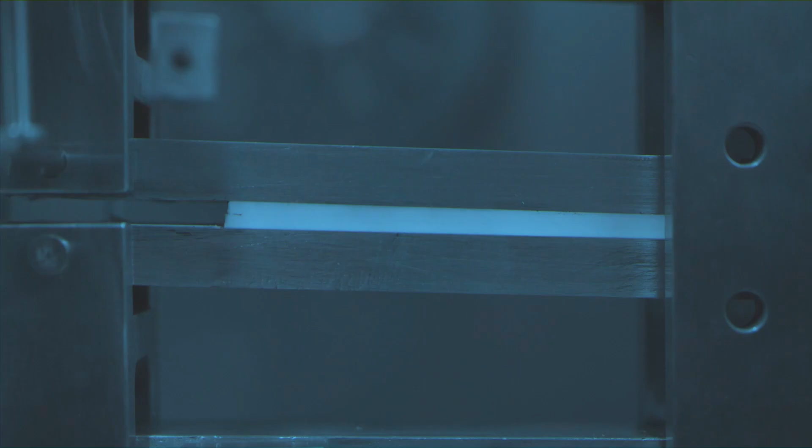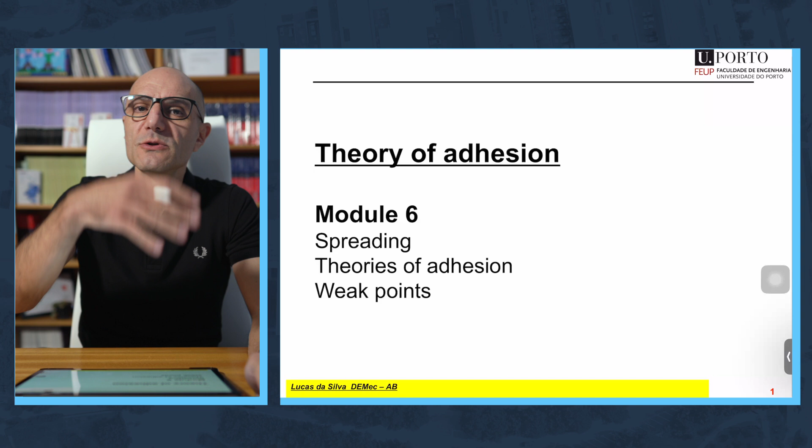This is the last part of the theory of adhesion. We will see how we can predict spreading of the adhesive and discuss the various theories of adhesion. In the previous module, we have basically seen the concept of the surface energy. But what do we do with that concept? How can we predict if an adhesive will wet or not, will spread or not at the surface of a substrate? That's what we are going to see in this module and discuss also other theories of adhesion and also the weak points associated to these theories.

So we know now what is the surface energy of the liquid, of the solid. It's much easier to understand in the case of a liquid. We have seen the demo with the needle on top of the water. What do we do with that? Well, there are many ways to explore this, more or less complex with many equations, but there is a principle that is very easy and that works, which is the principle of minimum energy.

And what this principle says is that if you have a surface of high energy, that of the solid, and this surface is substituted by another one with low surface energy, that of the liquid, then the total energy of the system decreases, and that's a spontaneous process. In other words, if the surface energy of the liquid is lower than that of the solid, then the liquid will spread. But if the surface energy of the liquid is higher than that of the solid, the liquid will not spread. So like this we can predict if we will have a good adhesion or not.

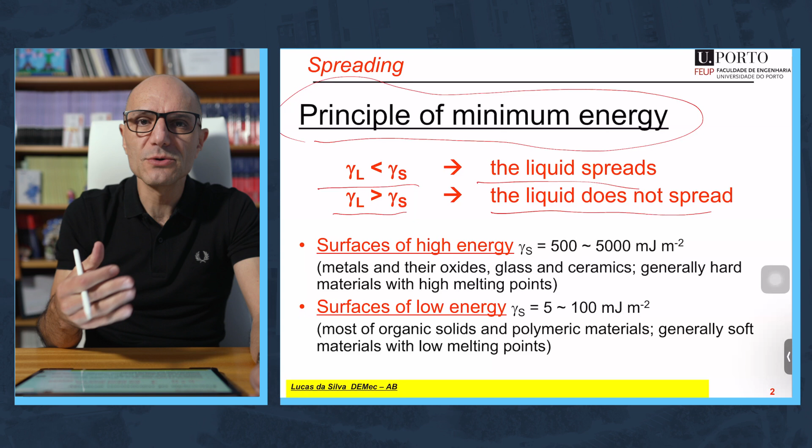Now, which materials have a high surface energy by nature? It's easy. It's those that are very hard. So metals, ceramics, by nature they are hard and they also have a high surface energy. They are easy to bond. Plastics, for example, they are very soft and they have also a low surface energy. They are very difficult to bond, all right?

You have here an image that shows which shape an epoxy will form at the surface of various materials: aluminum, PVC, a plastic, polyethylene, another plastic, or Teflon. Teflon is the worst case scenario, and you know that Teflon is used precisely when we don't want it to stick. You see, it's nearly a spherical droplet. So really, it varies from surface to surface. If you know the surface energy of the epoxy and those of the surfaces, you can predict if it will wet or not.

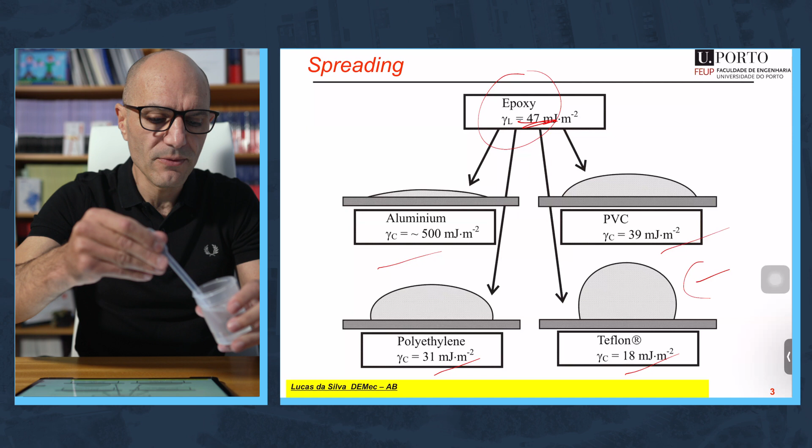We can play a bit now and do a demo with various substrates, and we will put a drop of water on each of them, and you will see the shape that it forms. We will go from very hard to very soft. So I have this pipette, and I will put water a bit on. I will start with glass. Glass is very hard, and I put my drop, and you can see that it wets. It spreads very nicely on the surface. It's expected because it's very hard.

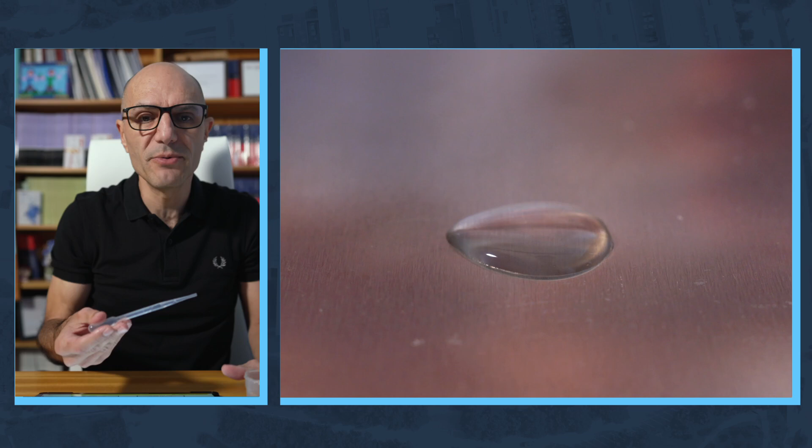I do the same now with the metal, with aluminum. And, well, the spreading is nice, but not as nice as the previous case, as with glass. Now, I go to a plastic. And again, it's getting round. The contact angle is increasing from this situation to this situation. It's very hard, less hard, and quite soft. And the contact angle is increasing.

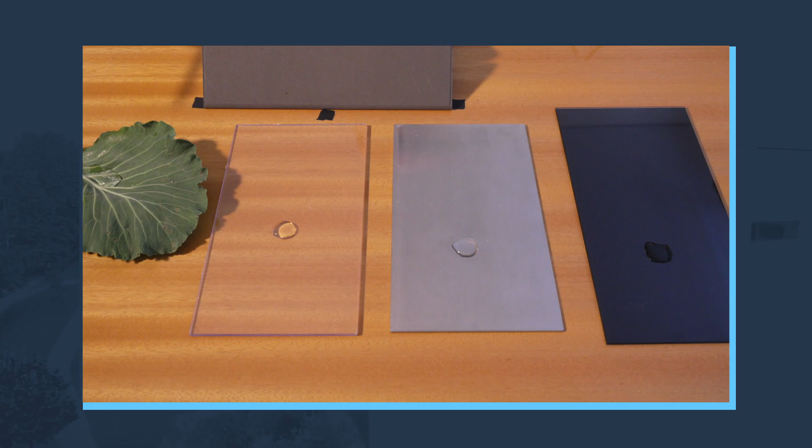And finally, I have a cabbage here. You all know what happens with cabbage when the rain drops, and you see, you have beautiful spherical shapes. Can you see? It's really, really nice, beautiful, okay? So, depending on the surface energy, the water will spread or not. The same happens if you use an adhesive, of course, but it's much easier to use water.

Okay, so after having seen this, how can the user intervene? What can we do to improve matters? Well, basically, increase the surface energy of the solid. For those that naturally have a high surface energy, like metals, like ceramics, what do you need to do? You just clean the surface, because all the surfaces have dust, grease, oil, so you need to remove these substances, and then you are left with a high surface energy. In the case of plastics, you can clean as much as you want, but the material itself has a low surface energy. In that case, you need to apply a surface treatment to increase the surface energy.

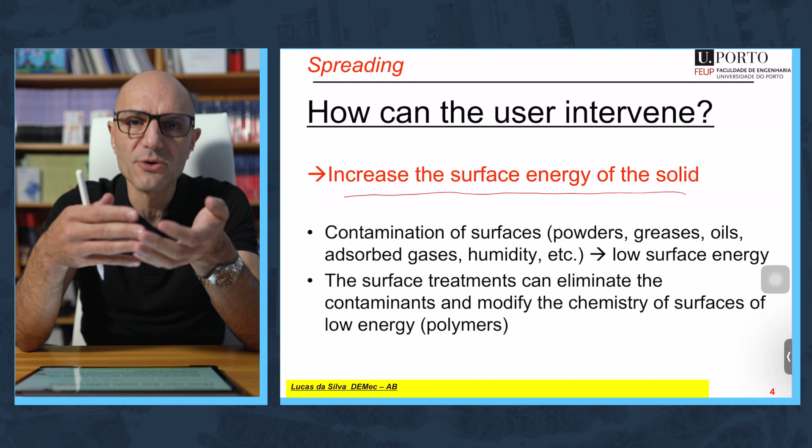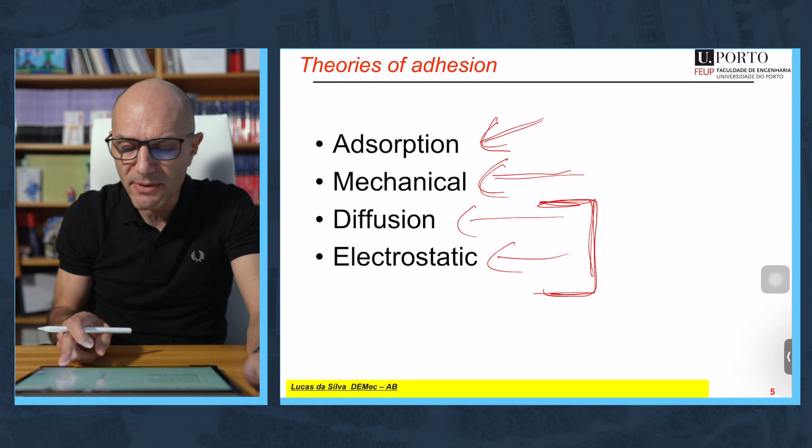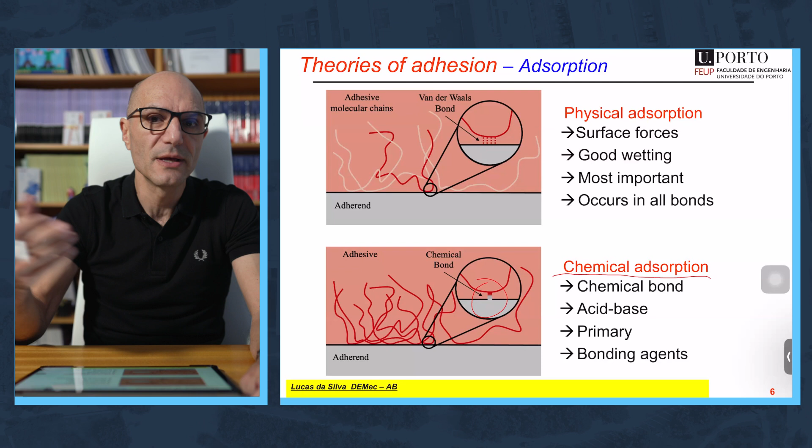But let's do a recap of the theory of adsorption. Basically, it says that when you approximate sufficiently the molecules of the adhesive to the substrate, boom, you will have van der Waals, and you can have ones that are stronger than others. The polar ones are stronger than the dispersive ones. You have a particular case of adsorption, which is the chemical adsorption, which is when you have a chemical bond. But in that case, you need to apply a special substance at the surface of the substrate to cause chemical bonding. And this will give you, of course, a higher adhesion and a higher joint strength.

But let's look at the other theories of adhesion, the mechanical one. This scheme is very easy to understand. As you know, there is a roughness associated to the surfaces, which is represented here in the substrate. And if the adhesive can penetrate into this roughness, because in general it can, if it has good wetting properties, then after hardening, there will be the creation of an interlocking at the surface, like this, and this, of course, also contributes to the adhesion.

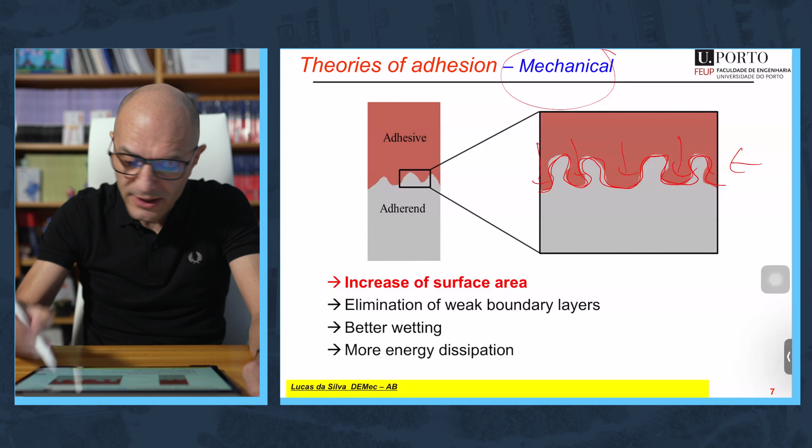In addition to this interlocking, because you have roughness, then you have an increase of surface area, increase of van der Waals forces. In general, you have roughness because you applied emery paper or shot blasting. This removed weak boundary layers. I'm talking about weak oxides. In general, roughness means better wetting, and finally, more energy dissipation because you will have plasticity of the adhesive at the interface.

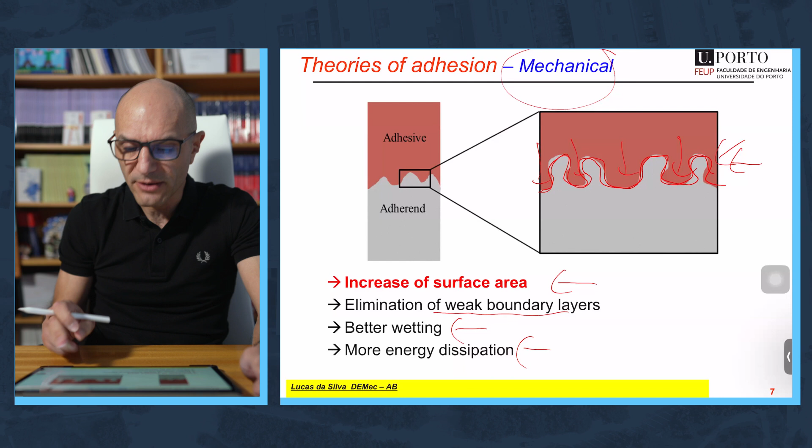The diffusion is a very particular case, and it happens when you have welding by solvent or heat in thermoplastics. I don't know if you have seen in your life how the PVC windows are made, but basically you have two pieces that are joined together because they are heated at the joining place. They are heated, a pressure is applied, and that's how it's done. It's a kind of welding. But this happens because you have interdiffusion of the molecules of the two polymers together, and this causes the welding.

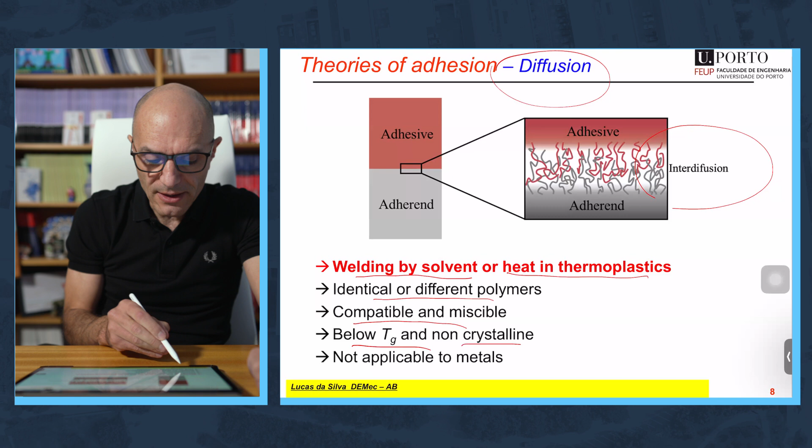But this can only happen if you have identical polymers. Different, it's a bit more difficult. They need to be compatible and miscible. They need to be below the glass transition temperature so that they melt. They can't be crystalline, and this is not applicable to metals.

Another theory is the electrostatic one, again even more particular than the previous one, and this is especially applicable to pressure-sensitive adhesives. I have shown you one pressure-sensitive adhesive when I did the demonstration about the peel. What happens is that you can consider this as a kind of condenser. One part is positively charged and the other part is negatively charged, and this causes attraction between the pressure-sensitive adhesive and the substrate. But this theory of adhesion is not that important.

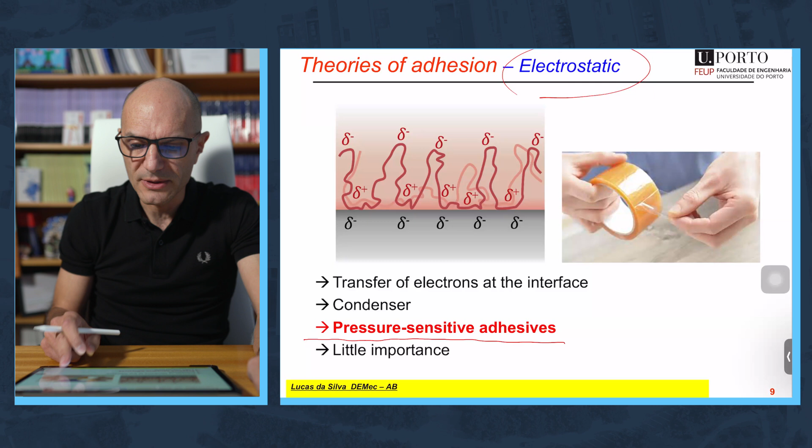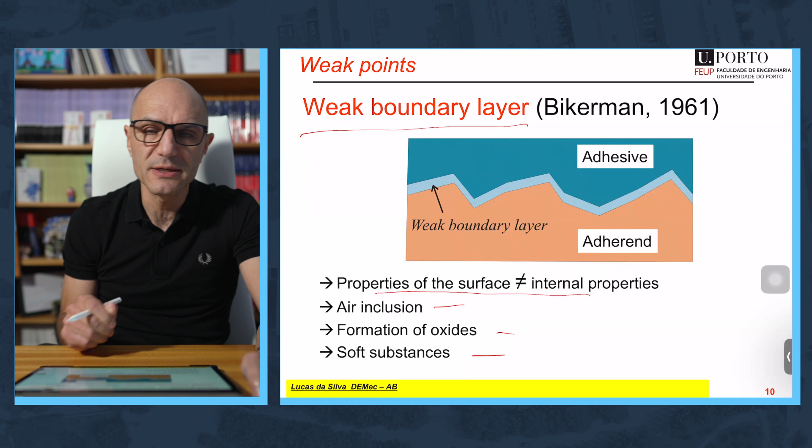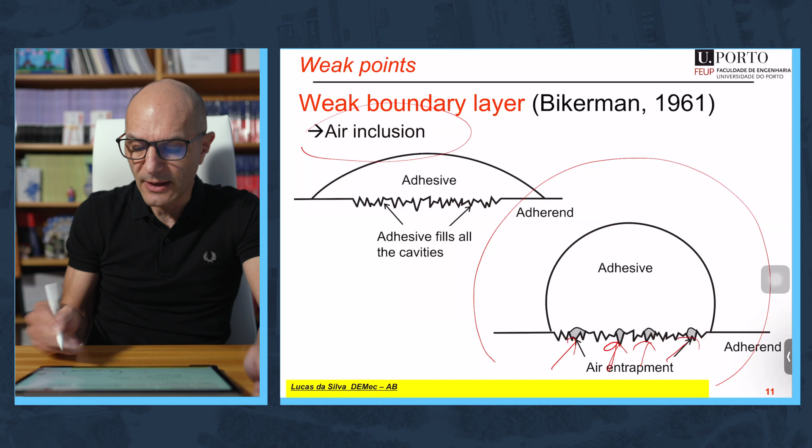But what's important is to refer to the weak points associated with the theories of adhesion. These theories of adhesion that we have seen don't take into account these weak points. The first weak point is the weak boundary layer. Why? Because the properties of the surface are different from the internal properties. It's unavoidable. You can have air inclusion, formation of oxides, and the migration of substances to the surface. For example, in the case of air inclusion, if you don't have good spreading, like the one represented here, then it's very easy to have air entrapment here. And this is not taken into account in the theories of adhesion.

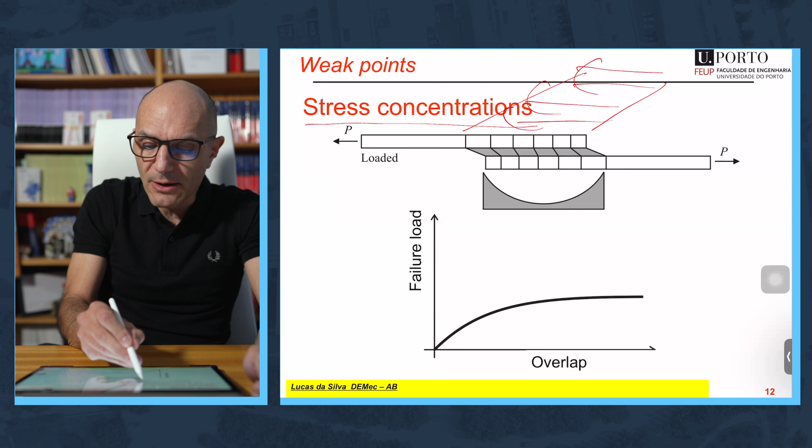Another thing that is not taken into account is stress concentrations. Well, I told you that when you load a single lap joint, the stress will be uniform. This is along the width, and it's true, I maintain what I said. But along the overlap, it's a different story. When you load a single lap joint, you will have stress concentrations at the ends of the overlap in the adhesive. We will see this in more detail in the section of joint design.

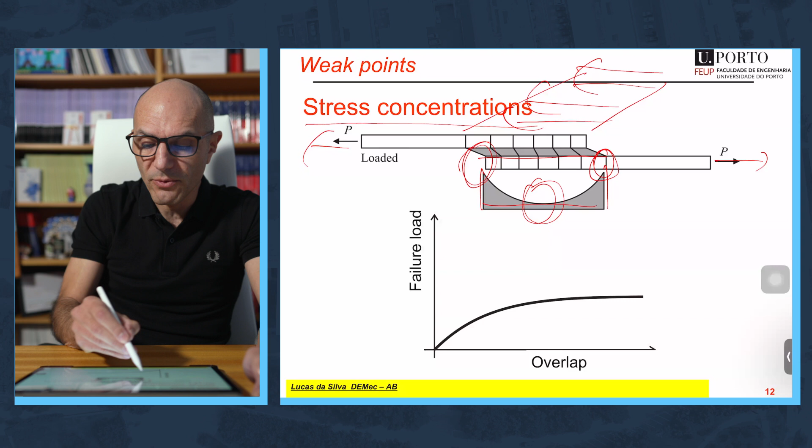So what does that mean? It means that in fact the stress is all concentrated at the ends of the overlap. The middle is doing nothing, and it doesn't really matter if you work with a short or a long overlap; the strength will be the same from a certain overlap, which is what is shown here in this graph, failure load versus overlap. And again, this is a point that is not taken into account in the theories of adhesion.

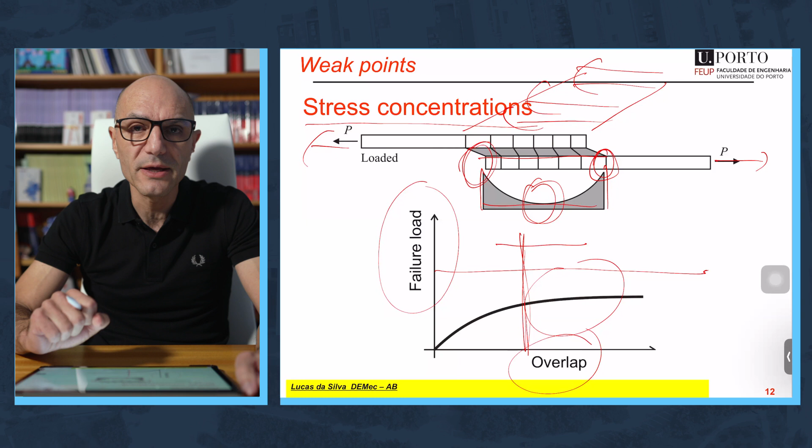So, in conclusion, this technology is beautiful, but we have a big enemy. The enemy, in addition to the peel load, is the surface. And I leave you with this saying of Pauli: God created solids, but surfaces are the work of the devil.